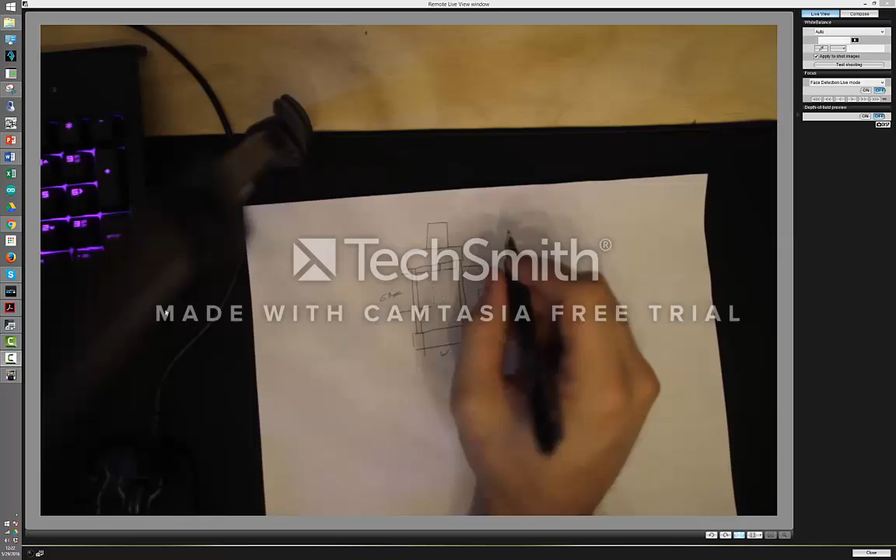So let's jump right into this. Building a hydraulic press is not going to be too complicated. There's not a lot of parts to a hydraulic press. You have the cylinder itself, you have a structural piece at the top, you have the structural pieces linking the top to the bottom, and you have some other system components such as a pump and a control system.

Now, the parameters that define the press itself are the stroke, the daylight, the length in this direction, as well as the width of the press. So those are important to define before you start the project. Usually the best way to define those is to just figure out what you want to stick inside this thing to press on. It could be as simple as trying to remove bushings from parts to something as complicated as pressing a mold with metal or plastic inside of it.

So moving on, let's talk a little bit about the system overview of the press. We have the press itself that we talked about earlier, and we have the hydraulic pump that gives the power to the press. Not all presses are going to be hydraulically operated. Some can be mechanical or electrically operated. And we have some sort of control system that controls the pump as well as the motion of the press, and that'll consist of hydraulic controls as well as electrical controls.

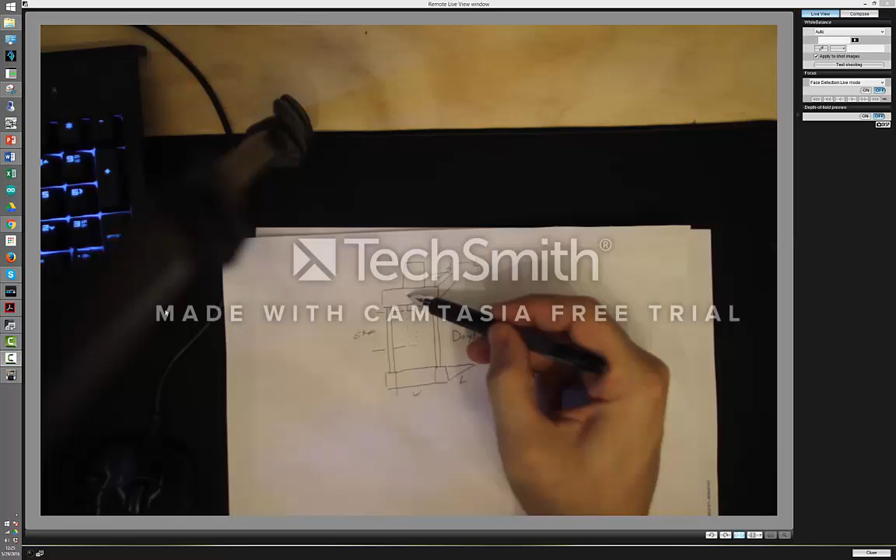The first phase is going to be a design phase. The second phase is going to be a build phase, and the last phase is going to be a testing phase. So during the design phase, what we'll begin with is the actual design of the press physical components, the structural components. So we'll design and come up with equations to specify this top portion here, each of these little side pieces here, this bottom portion here.

We'll design the actual cylinder itself, and we'll design all the bolting connections to make sure everything goes together and doesn't come apart when we apply maximum force or maximum load or maximum displacement or maximum speed. The second thing that we'll design is the cylinder assembly and the hydraulics. This is somewhat separate from the controls.

The hydraulic controls are a little bit different than the electrical controls, but we'll somewhat try to divide these into three separate portions. I think we can accomplish each one of these possibly in a 30 minute to an hour video, but it could be longer. I might have to break them up more than that.

Now moving back to the build phase, we'll try to go through some of the manufacturing and procurement of different parts. Unfortunately, I'm not sure that I'm going to actually build a new press for this project. We might though. I'm still on the fence on that. They can be pretty expensive, especially the manufactured parts, and I've already got several functioning presses.

So what we might do is go over the necessary steps to do that and talk about them, and then utilize the components I already have and go through the assembly, especially on the hydraulics. I actually have specified out a new hydraulic system for some of the presses that I have, so that could be real easy to show the assembly of the hydraulics.

And I think honestly the manufacturing of the press components themselves is such a simple process, and there have been so many other videos that have gone over that sort of manufacturing, that it's really not going to add anything to what's already out there. The assembly, though, there are some interesting things that we would want to do when assembling this press that I think are worthy of going through.

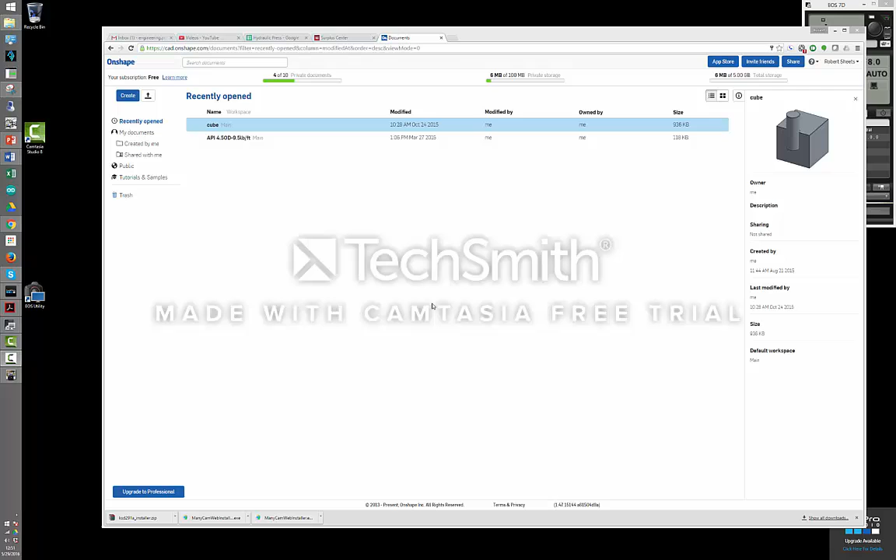So the next thing I want to do is make some decisions that have to be made to move on with the project. One of those sets of decisions is to flesh out these initial parameters. I have some stuff written here - this isn't what we'll end up with, but I'm going to do some measuring of parts we're going to make, and come up with parameters such as the daylight, stroke, tonnage, the action, the press mechanism, the frame configuration, the width, the depth, the budget, the electricity availability, the time frame, the controls, and the footprint we have to stay in for our press.

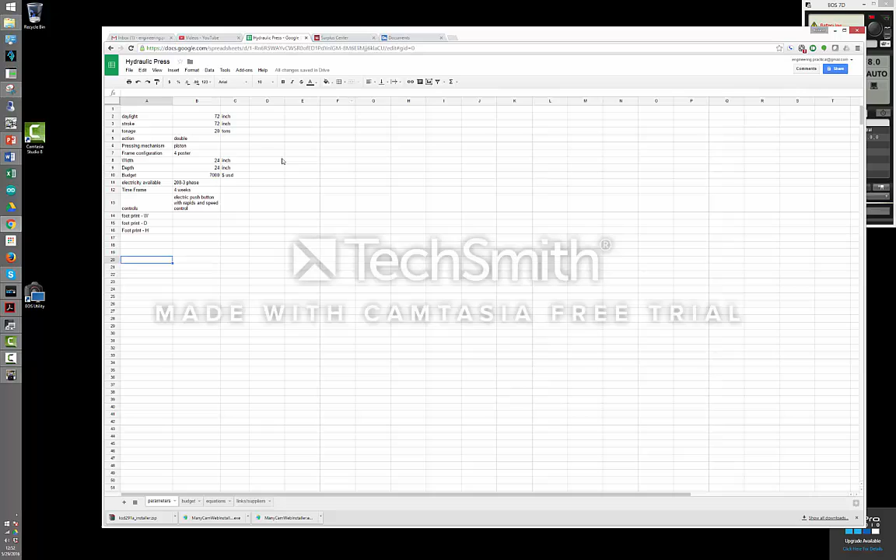One of the key things to define all this is that this press needs to be built around a hydraulic cylinder. There are several options for hydraulic cylinders. The first option is to buy something used. Surplus Center is a great resource for hydraulics, especially on the used side. They have a great website - you can go in and pick basically anything you need.

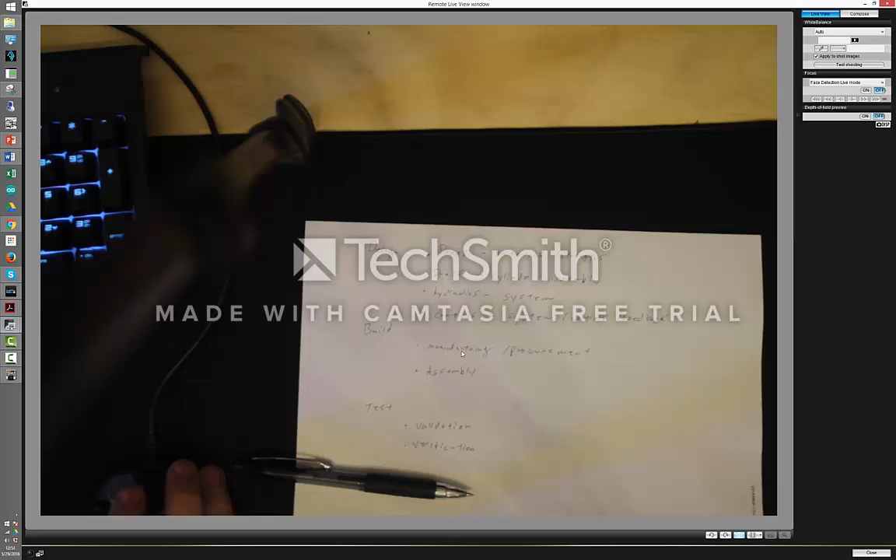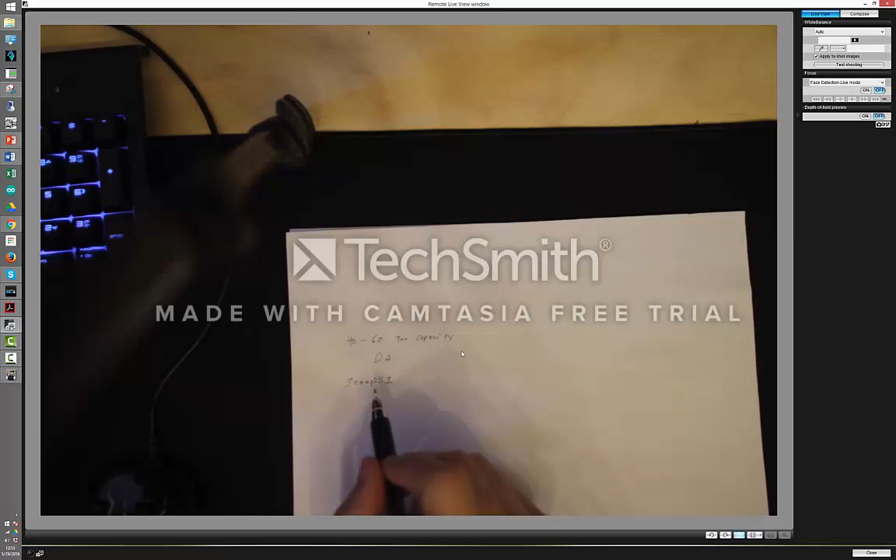So in order to choose a cylinder, we need to come up with the capacity of this press. I'm going to choose an arbitrary 40 to 60 ton capacity, and this is going to allow us to select a cylinder based on that. We know we want a double acting cylinder, we want it to be 40 to 60 tons, and system pressure for hydraulics is commonly 3,000 psi - that's a pretty common standard amount of pressure you're going to find. So with these three components, we'll definitely be able to narrow down our cylinder choice.

I want to start by saying in these videos that I wasn't born with any of this knowledge, and if you feel confused or feel like I'm not explaining something properly, don't be afraid to ask. I was taught all of this by someone else, and I had to figure it out, either by way of teaching or on my own, and it didn't always come quickly. So if something's not clear, please ask me in the comments, and I'll do my best to create other videos to explain stuff and make it as clear as possible.

After recording some video, I think I might have jumped into some things a little too quickly, and I wanted to come back and discuss the principles of operation of hydraulic systems and why we use them and why they work.

The principle of hydraulics revolves around force over area. So pressure equals force over area - this is a governing equation for hydraulics, and it's very simple. If you apply a given force to an area, you get a pressure. If you apply a given pressure to an area, you generate a force. So these items are all related to one another. We can rewrite the equation again with force over pressure equals area.

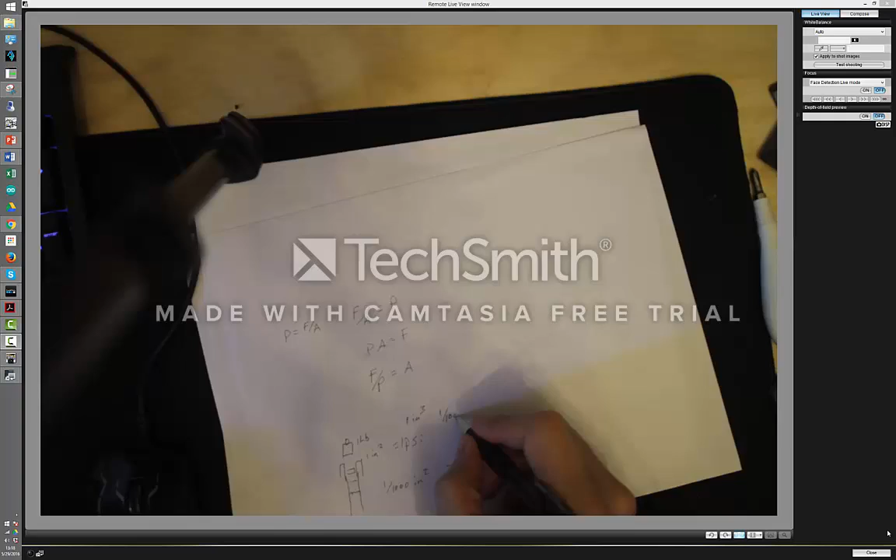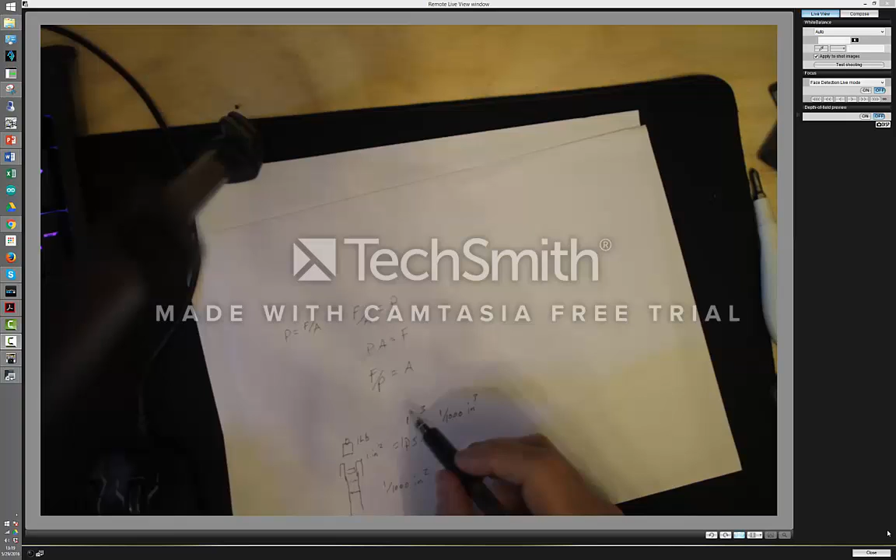Now the same thing for the really tiny 1/1000th of an inch squared area cylinder is that every time it moves an inch, you only get 1/1000th of an inch cubed in volume displacement. So you've got to push a lot further, 1,000 times further, for this one to get the same amount of volume as this one.

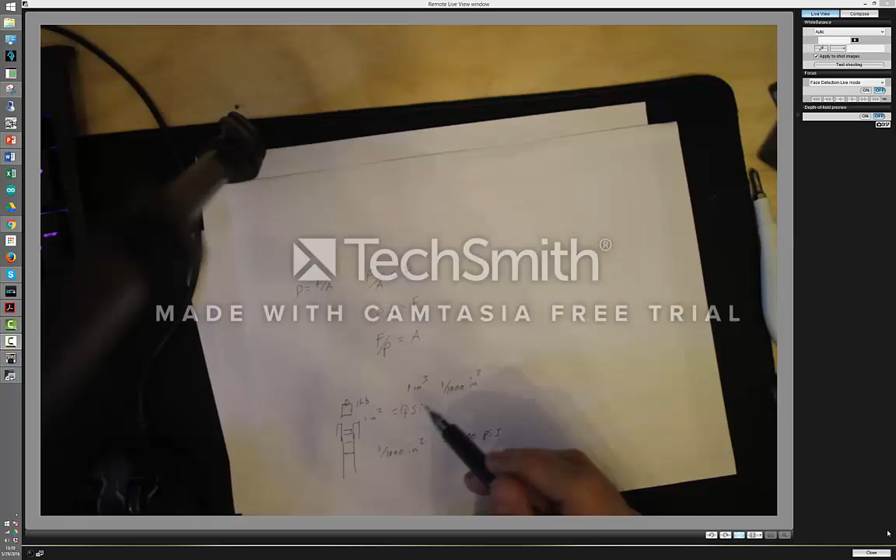So that's not really that important when you're trying to generate a static force, but when you're trying to move something large that requires a lot of volume displacement, the amount of work you have to do is significantly increased. So the amount of work to get 1000 psi is nearly 1,000 times more than the work to get 1 psi with the same force. This in a hydraulic pump is what's related to getting your horsepower and the energy it actually takes to power the system.

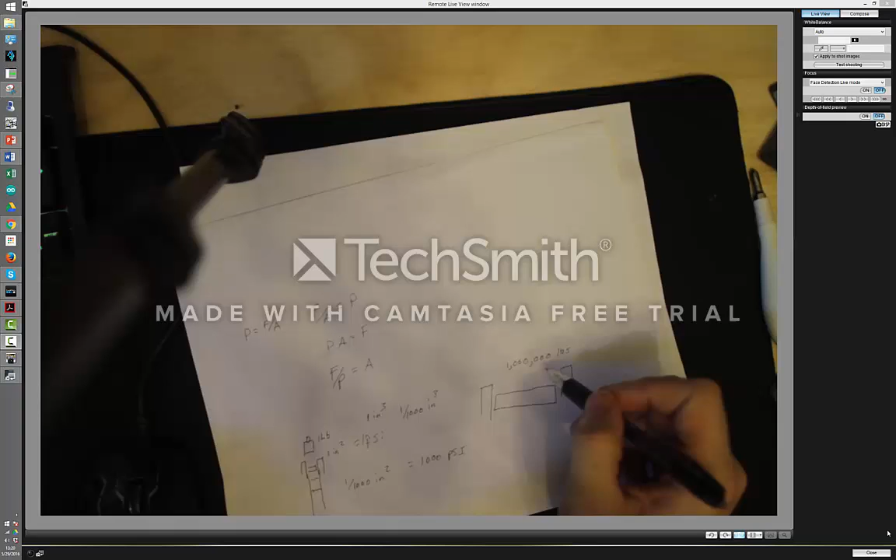So looking at the other direction, say we have this 1 psi weight, this 1 inch cylinder with a 1 pound weight, and we generate 1 psi. Well, we can theoretically move very immense loads if and only if our cylinder has enough area. So for a 1 psi system, say we needed to move 1,000,000 pounds. Well, in that case we would need a 1,000,000 square inch cylinder in order to move that 1,000,000 pounds with just slightly more than 1 pound.

But again that trade-off comes into play here. So say you have that 1,000,000 pounds on top of the 1,000,000 square inch cylinder. Every time you put a cubic inch of fluid into that cylinder, it's only going to move the cylinder up or down by 1/1,000,000th of an inch. So there lies the problem: you have this balance between a small amount of force over a small amount of area not giving you very much distance traveled.

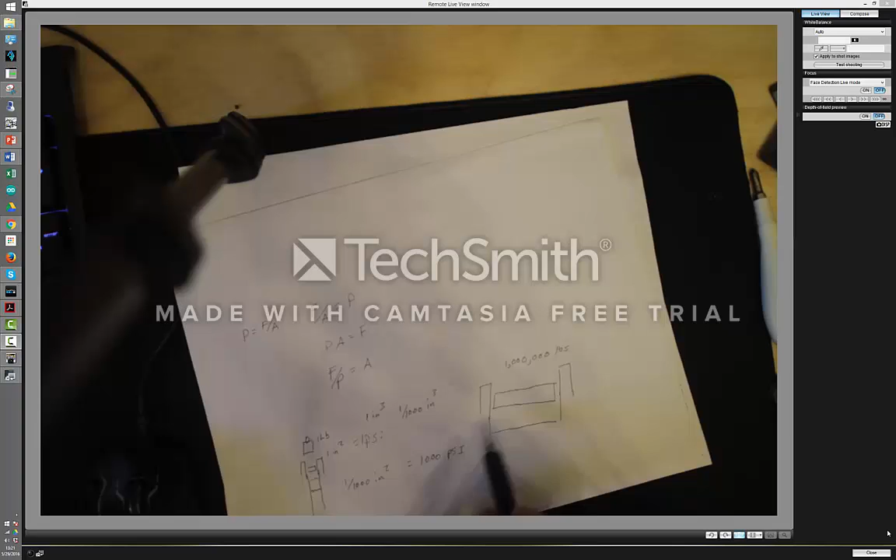I hope this somewhat clarifies how the force, the pressure, and the area interact, and kind of why we use hydraulics. Because again, you can use small amounts of force to generate very large amounts of force. However, there's a trade-off in the amount of work you have to do in order to generate the motion.

So the way we'll be able to make that cylinder choice is pretty easy. We know we have a maximum pressure of 3,000 psi, and we want 40 to 60 tons. So starting at the low end, 40 tons times 2,000 pounds gives us 80,000 pounds, and on the high end that's 120,000 pounds. In order to convert this to cylinder diameter, we know we have a 3000 psi maximum system pressure, so if we take 80,000 and divide it by 3000, that gives us the particular areas we need.

Forgive me for not being able to do this in my head, I'm going to use a calculator here. So that's saying we need a 27 inch squared area, and on the other one, we're going to need 40 inches squared.

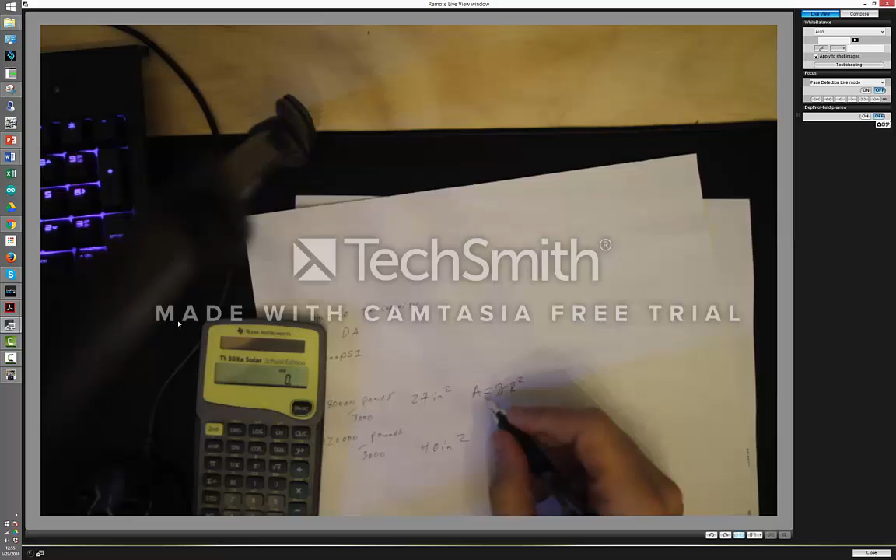So once we have the area we need, we then find the diameter we need. That's pretty easy: the area of a circle equals pi r squared. So if we solve backwards for r, which we can get d out of, because 2r equals d, then we can come up with the radius or diameter we need. We know we're going to have two different ones, 27 and 40 will be our a variable. So the first thing we'll do is a over pi equals r squared, and then if we take the square root of a over pi, that equals r.

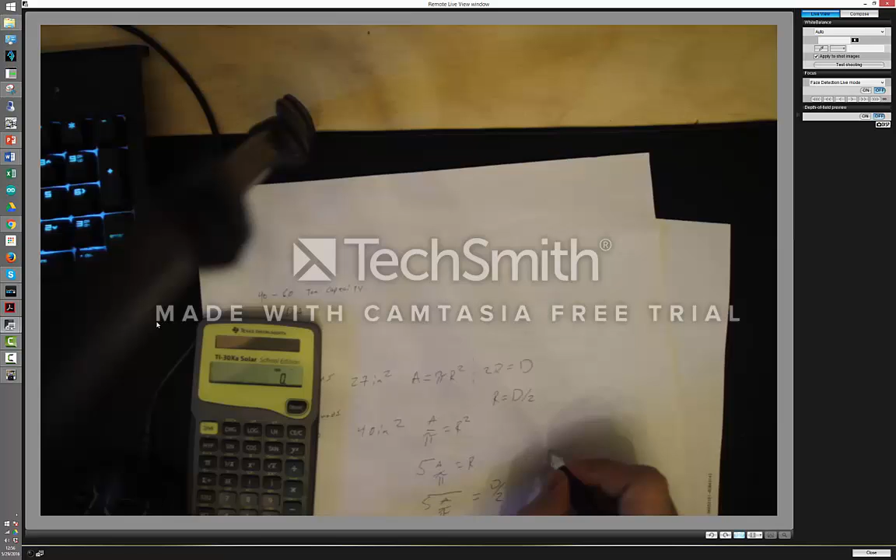Now, if we substitute in for d, we can do r equals d over 2. If we plug this into the equation, we get the square root of a over pi equals d over 2. Multiply both sides by 2, and d equals 2 times the square root of a over pi. We then solve this equation to get our diameter.

So that's 8.6 under the radical, and we got 12.7 under the radical. So that one equals 2.9.

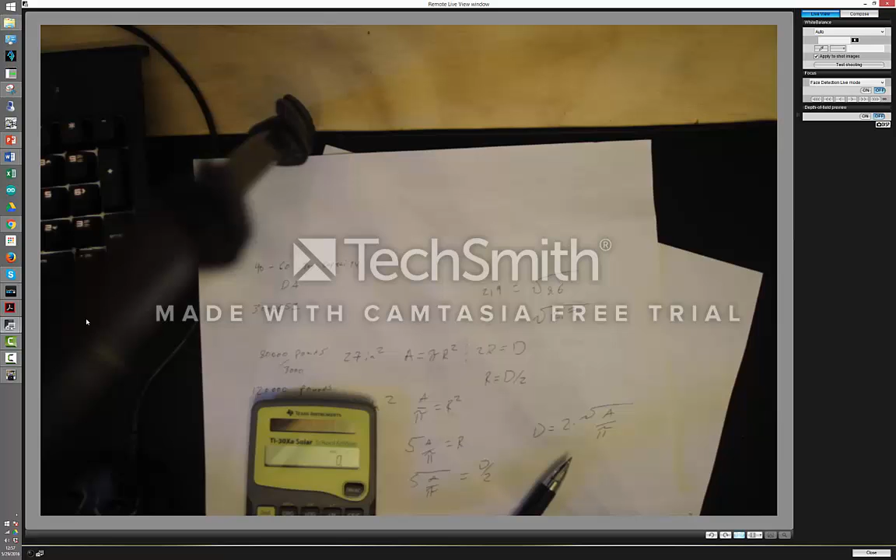So if we substitute these two back into this r equation, or multiply them by 2, basically we're getting that we need a more or less a 6-inch diameter, and we need a 7-inch. So we need a cylinder that's 6 to 7 inches.

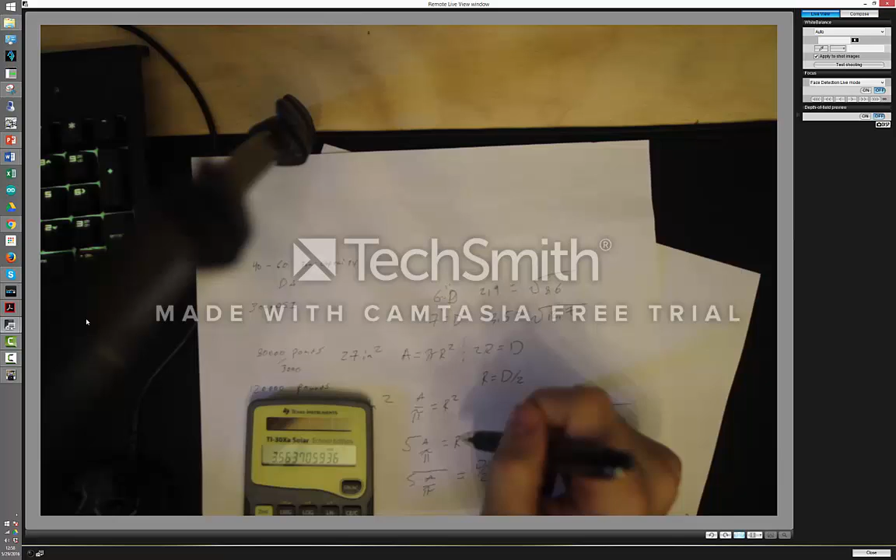And if any of this is confusing or you don't follow, I can make a separate video that shows this over again and tries to simplify it out or make any steps that are lost more clear.

So now that we've narrowed down our search to the diameter that we need, I've gone through and looked around at what they have there so we don't have to spend so much time on their website. Basically what I've done is I've gone to hydraulics, then double acting cylinders, trying to narrow down our range. I went to 7-inch and larger because I feel like there's a cylinder here that'll work.

So now that we have this cylinder selected, we're given quite a bit of information. Enough information that we can successfully model this cylinder in our CAD program and use that to start our modeling and begin the design derivations or iterations in order to create the press.

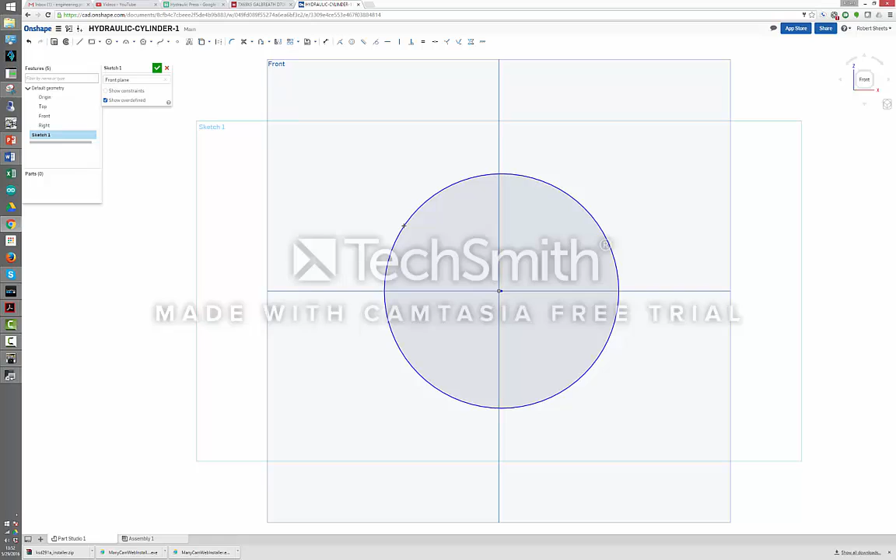So we're gonna make this the inside diameter of the cylinder. It's not really necessary to make this as it is, but in this case, I'm going to go ahead and do that.

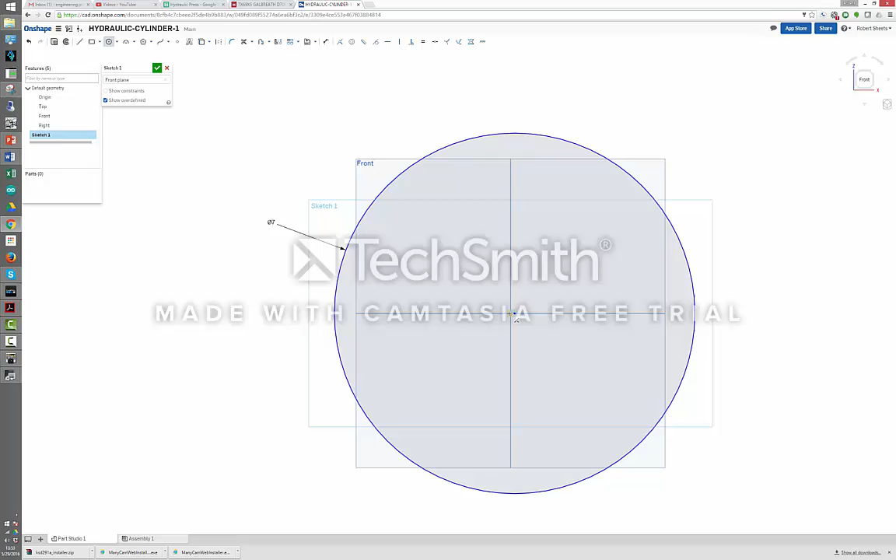Now, unfortunately, this does not give us the dimension of the actual outside of the cylinder. I'm going to make an assumption that it's not going to be much bigger than 8 inches, or maybe 8.5 inches, based on these pictures. Sometimes that's just something you have to do whenever you're presented with surplus equipment, or you're trying to model something you don't know exactly. You just gotta make a decision and put it in there and live with it, good or bad.

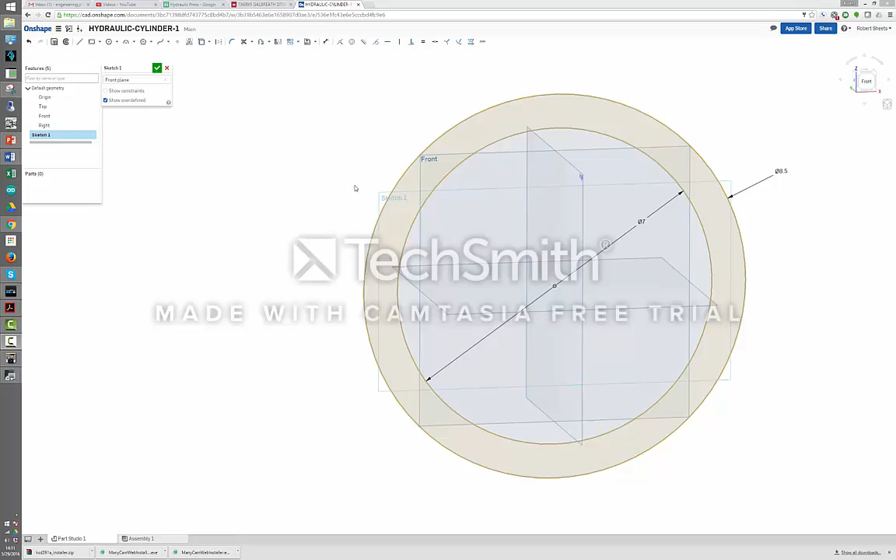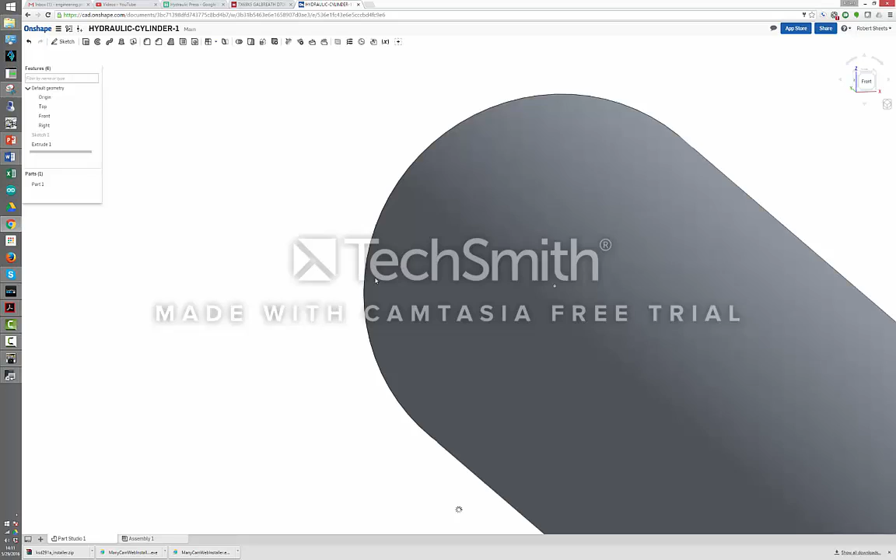So now we're going to extrude the cylinder out. We're gonna make it the length specified here, which is 76 3/4. Not 100% sure that that is the entire length of the base to the back end of the cylinder, but I believe that's what they're saying there. It'd be helpful if they would provide a drawing, but they don't, so it's kind of the best you can hope for. Some of the stuff on their website's a little bit more detailed than others.

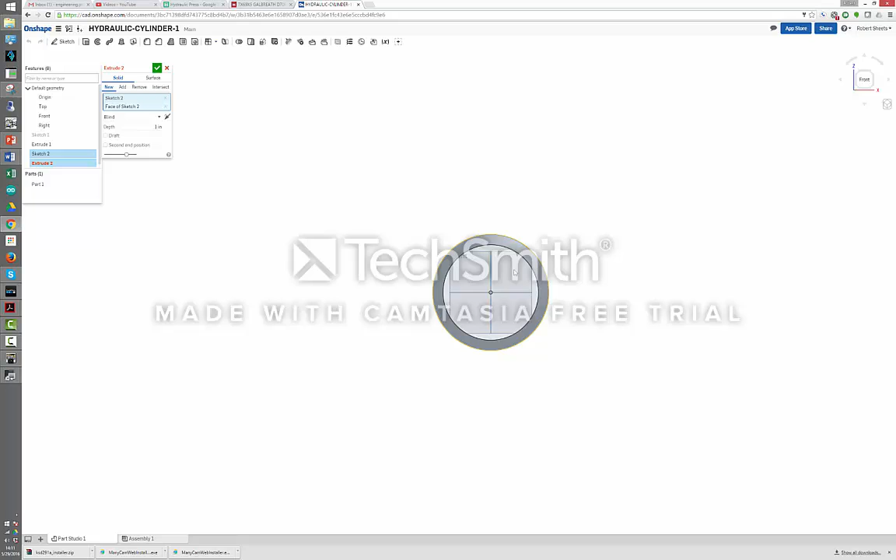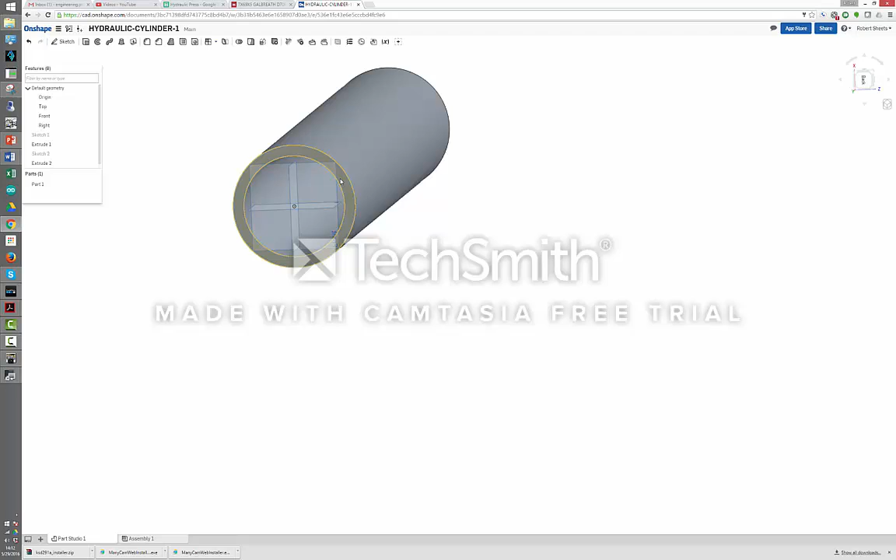We're going to close the end of this cylinder with another extrusion. That's one nice thing about Onshape — you don't have to make a new sketch all the time for the extrusion. I feel like you have to do that more in SolidWorks; it's a little bit more intuitive sometimes. So now we're gonna go ahead and create the flange over here.

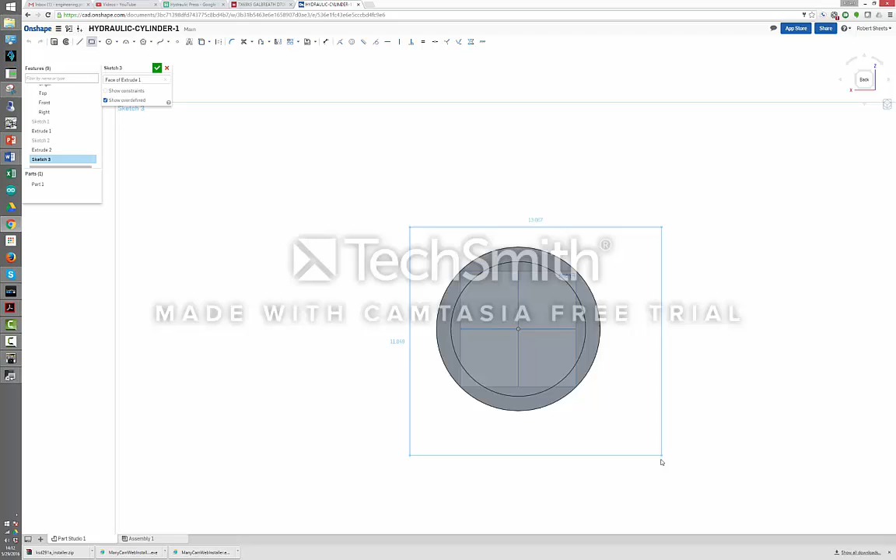So we'll start out by creating a square, 12 inches by 12 inches according to the drawing that we got from them. There we go.

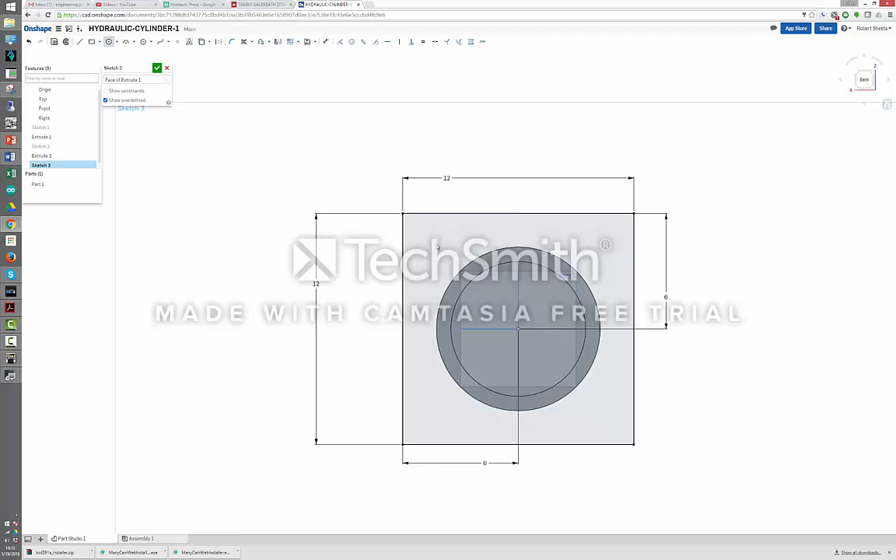If you guys are picking up any background noise, I do apologize for that. I don't have the best mic setup since this is something new that I'm doing. I'm just trying to work with what I've got, which is a pretty standard headset. But if this actually is well received, I might upgrade some of my equipment.

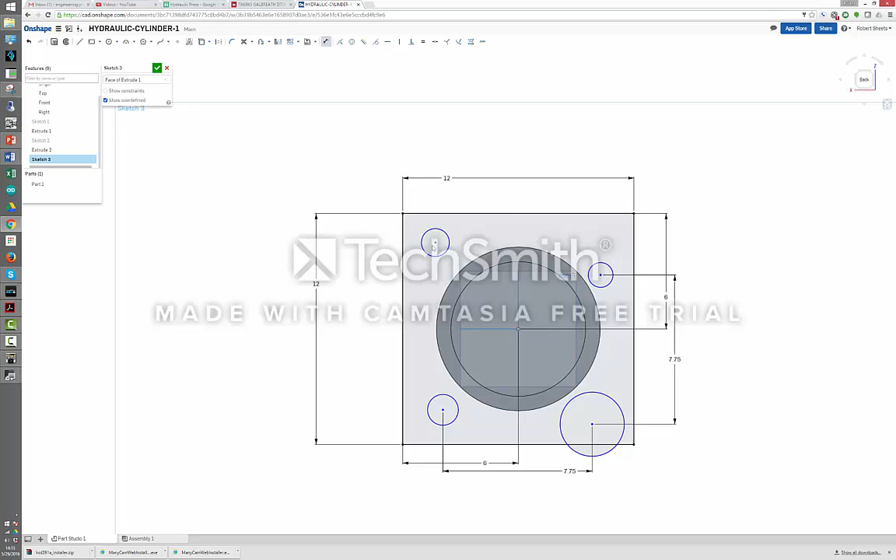One thing that's a little strange about Onshape is the way that you select constraints in a sketch seems to be a little bit different than SolidWorks. For whatever reason, it seems like they're missing a collinear constraint, but maybe that's just what I'm doing here right now, and it's just a little bit odd for the program or something. I'm not entirely sure.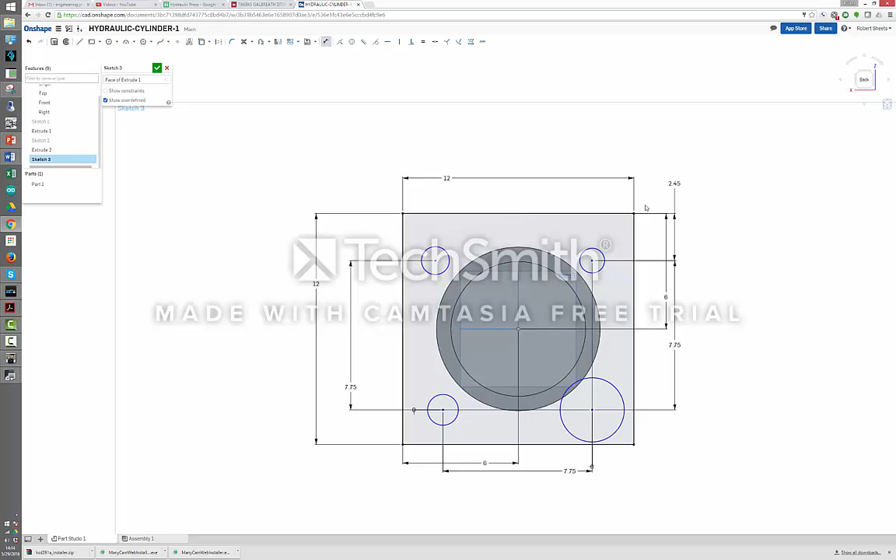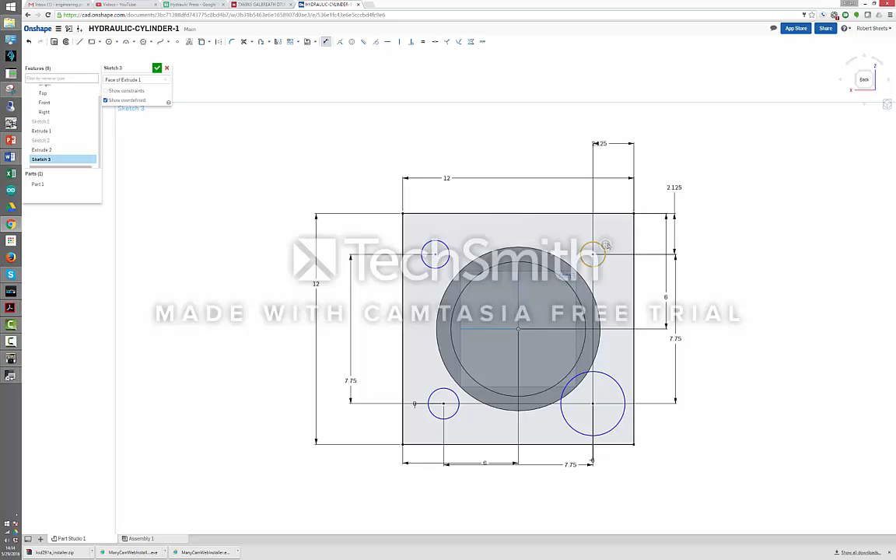Specify this dimension from here to here, which is going to be the difference between 12 minus 7.75 divided by 2. This would be 2.125. And I'll specify the dimensions from here to here. Then we'll just make our hole size.

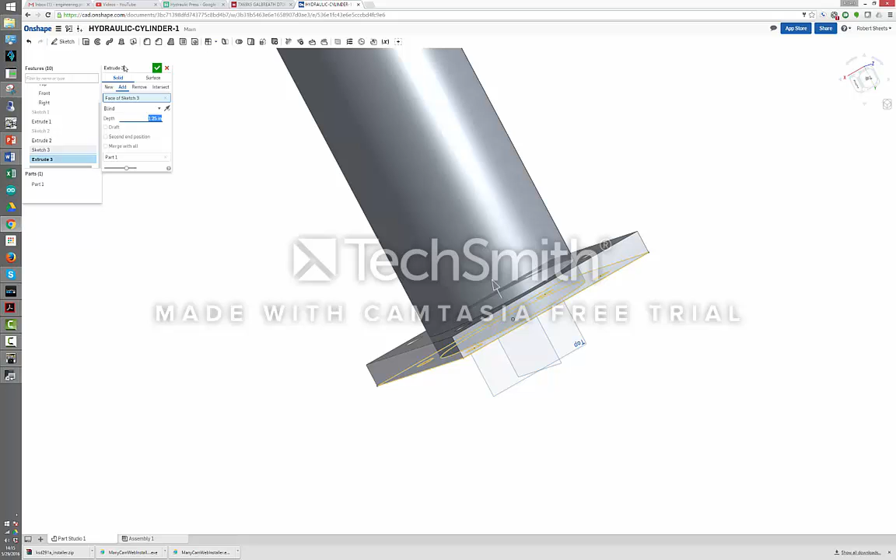Done with that, extrude that portion. And it needs to be the opposite way and 1¼ inches. And that'll do it for the body of this cylinder. I'm going to create another part for the actual rod. That way we can manipulate it inside. So we'll pick up there.

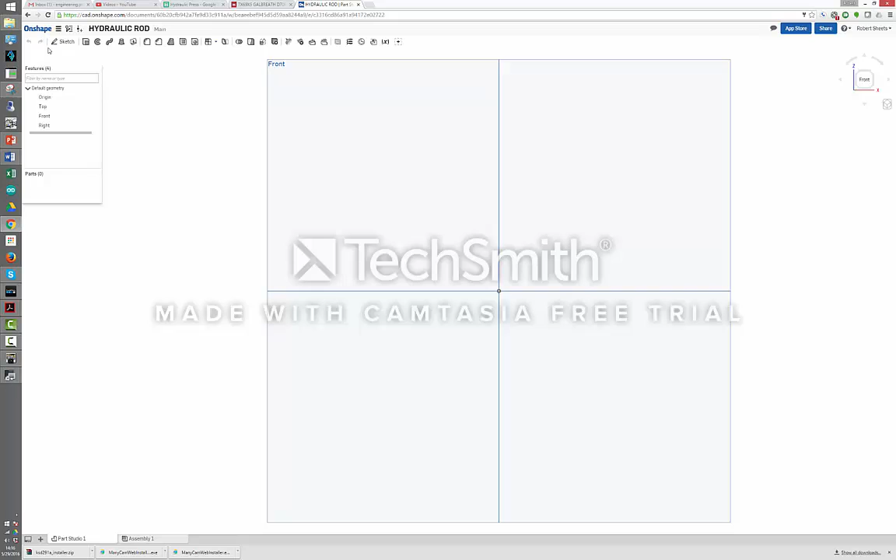So picking up at the hydraulic rod. Design this simply enough. Again, start at the front plane, create a sketch there, circle. I'm using keyboard commands for some of this stuff. It's just what I'm used to. Luckily, the keyboard commands in Onshape seem pretty intuitive. This is all just arbitrary lengths. They aren't really all that important.

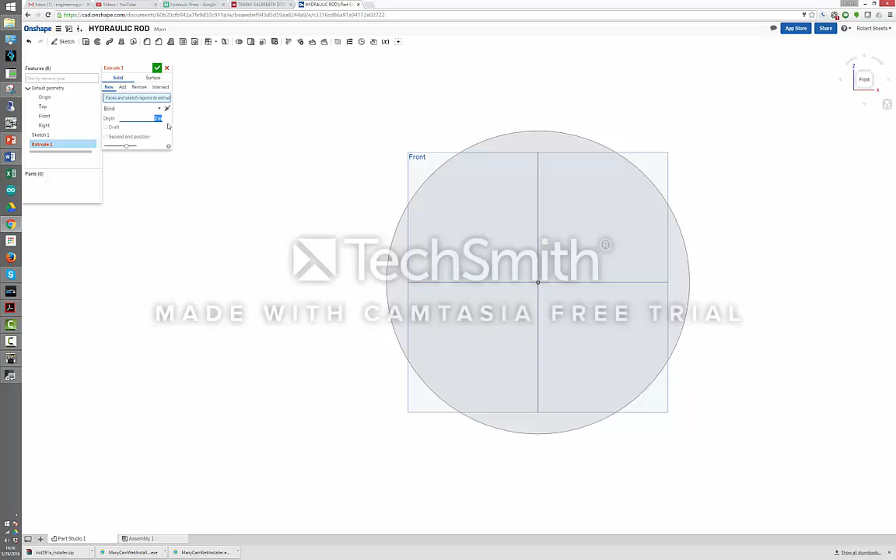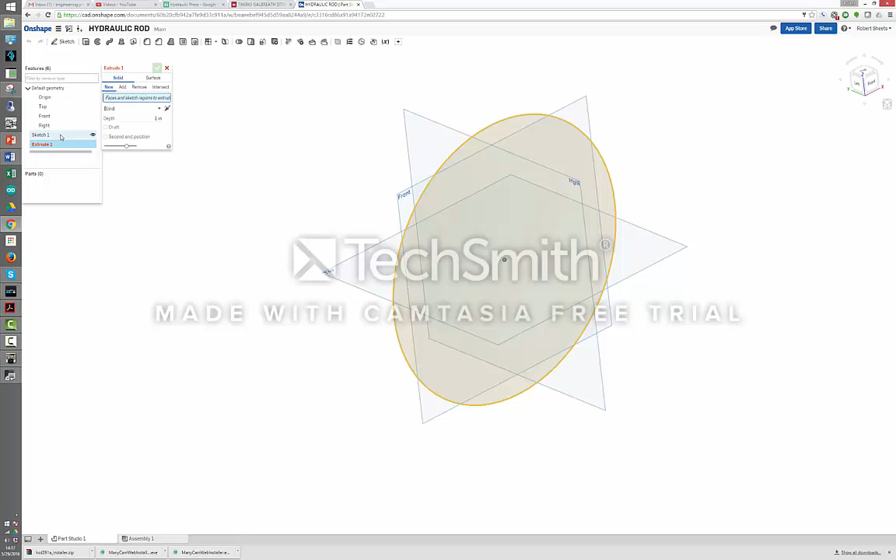Some sort of error here. Let's see what they're saying. It's saying that we're not selecting something on this extrude. I'm a little bit confused there. Let's try this again. Extrude solid from sketch 1. Extrude that, say 4 inches. Okay, there we go.

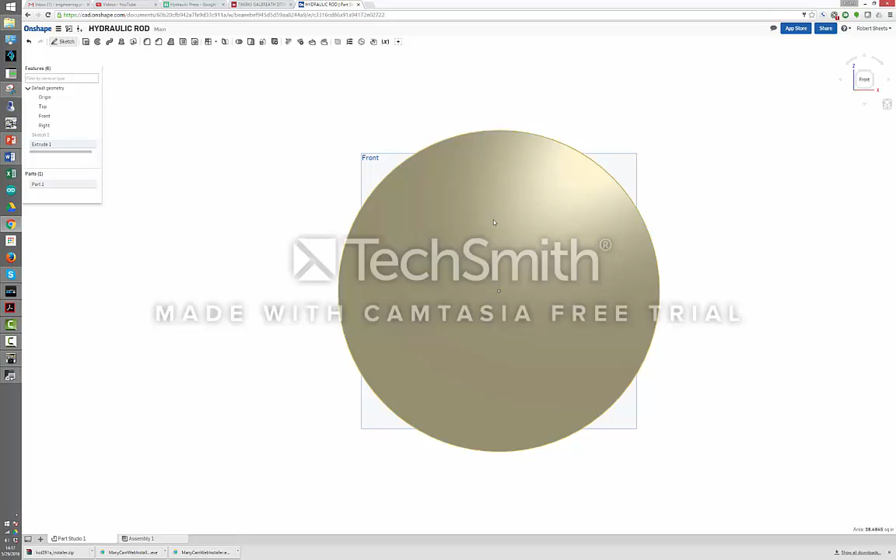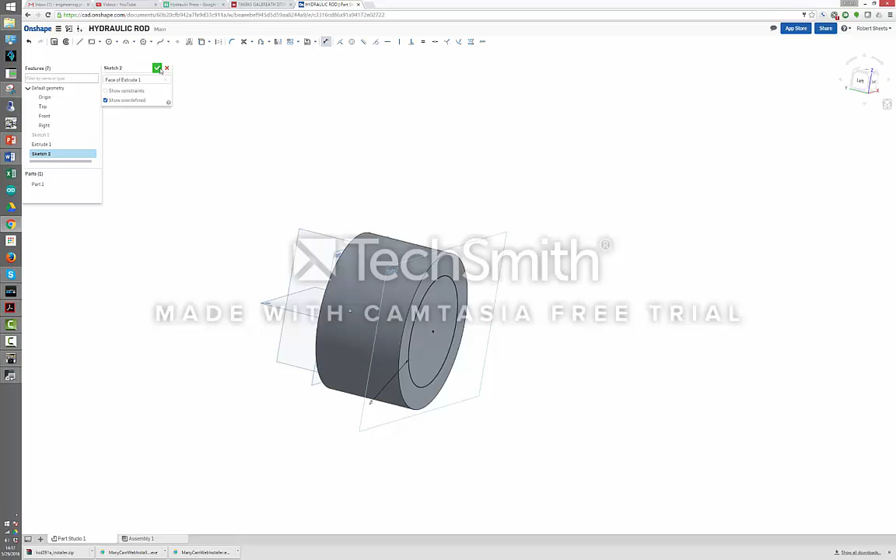And we'll make this part the actual same dimension as the rod. And we're going to make it slightly longer than the stroke. I'm going to give it 2 more inches than the actual stroke of the rod, just in case we need to put some stuff inside to manipulate it. But I think that should be pretty good. So make that 71 inches. Check. And we have our cylinder rod.

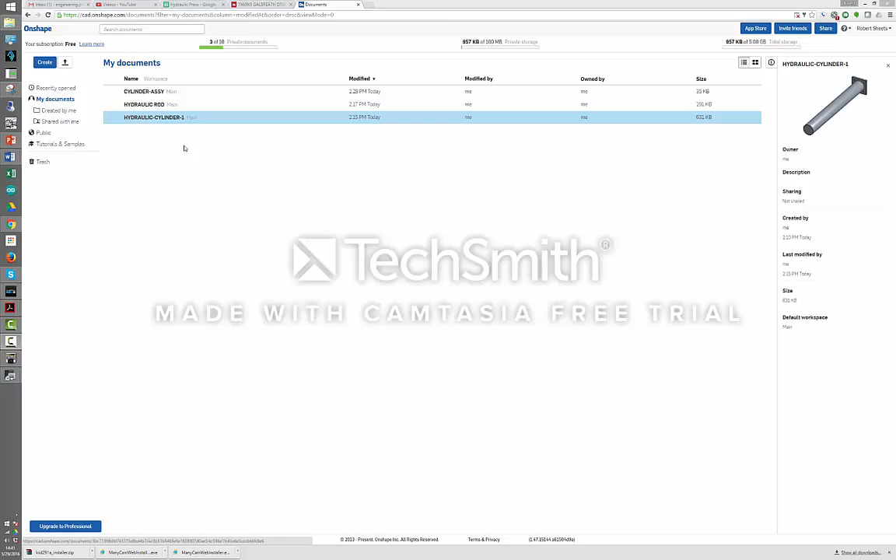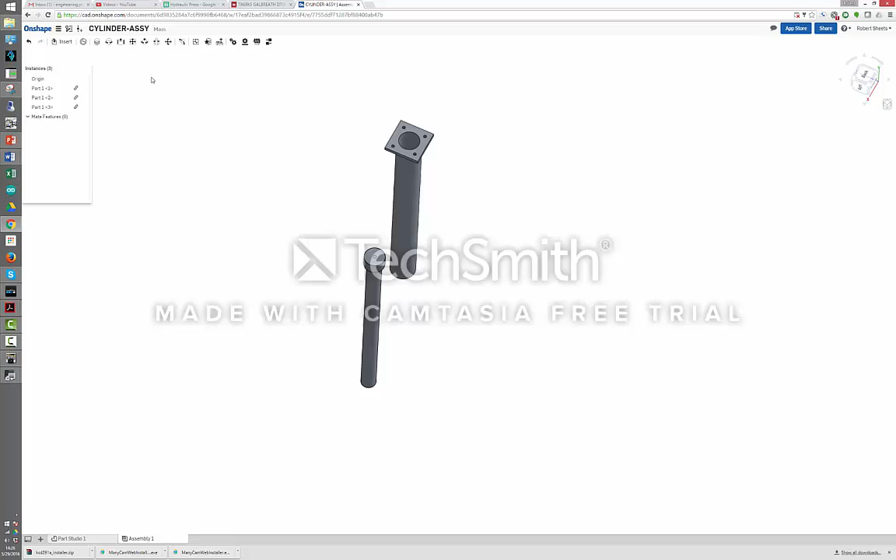One note is that in Onshape, I'm not exactly sure why it does this, but every time you make a drawing, you have to go back into the drawing, it seems, and in order to put it in an assembly, you have to save a version. So in this case, it's wanting me to version 2, but I've already previously created versions of each of these so that we could place them in the assembly. Parts inserted here, and I'm going to mate them.

Off camera, I've done a little bit of research and figured out what I was doing wrong and what I need to do. So it seems like the slider mate is the proper mate to use here.

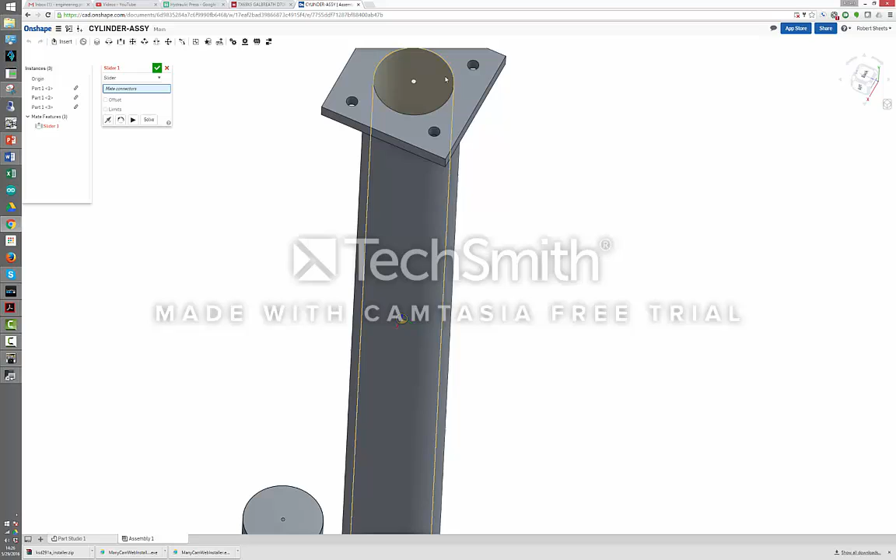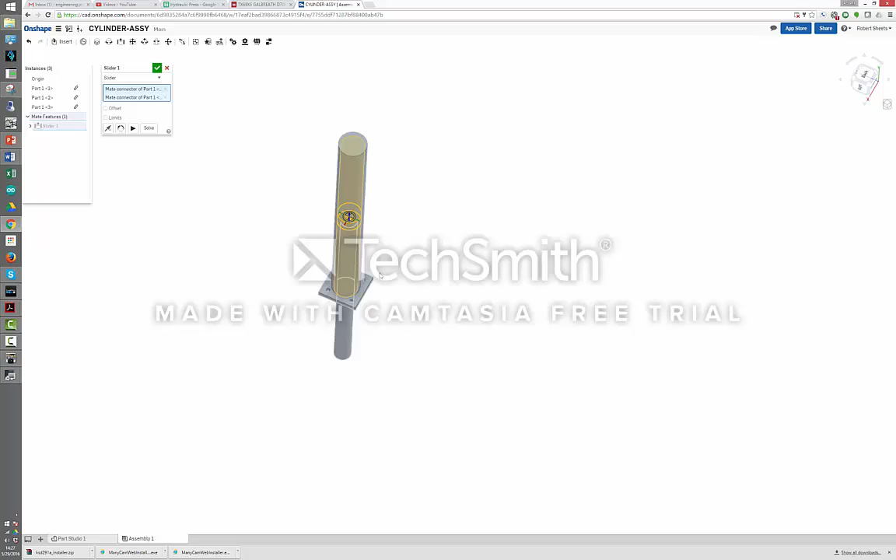And everything in Onshape is a little bit clunky. Honestly, if SolidWorks is clunky, this is even worse. Which SolidWorks is pretty clunky. But a lot of times it's struggling with doing things in a semi-quick way, even though it's supposed to be cloud-based and not use any resources on your computer, which I can fully see that it's not. Every time you go to insert parts or mate something up, there's a little bit of lag there, and sometimes you're not exactly sure if it's you or the computer. So that's definitely something that they need to fix up a little bit.

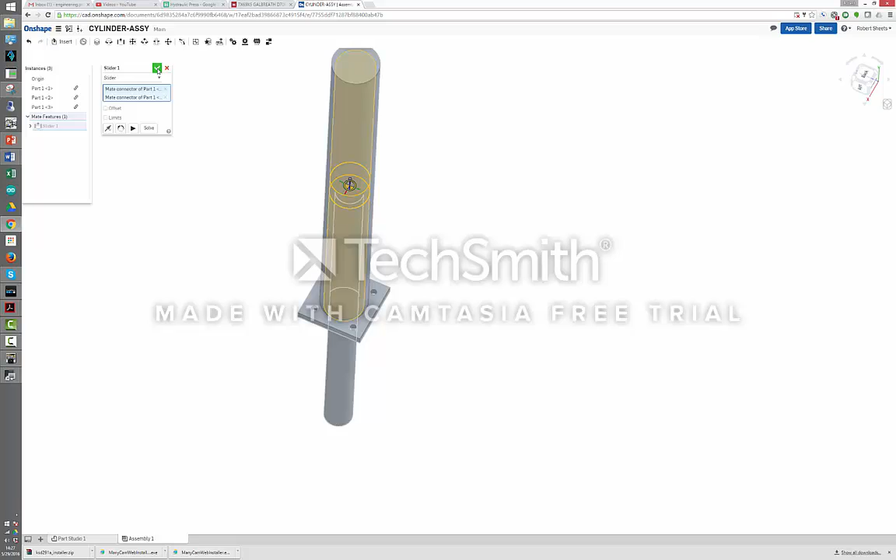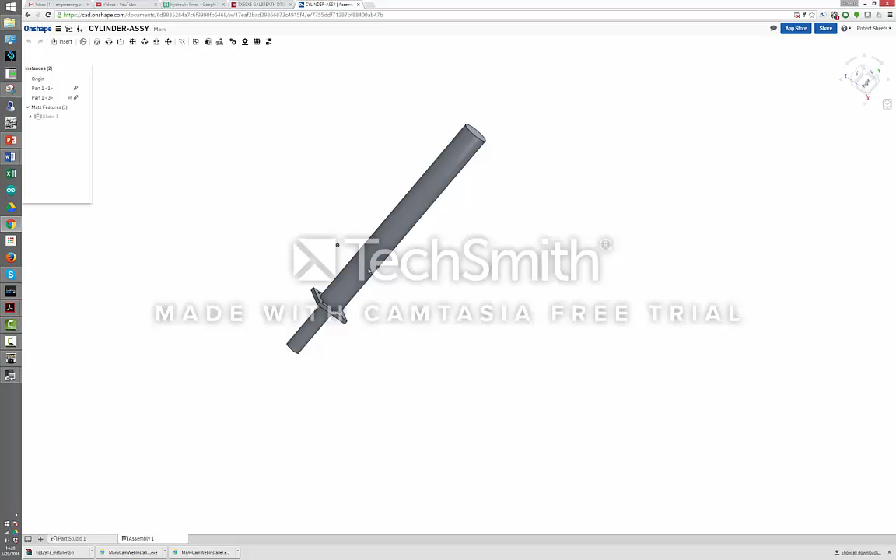So what I can do here is fix this component in space. And then we have our cylinder, which needs some work, but anyway, as you can see, you can slide it around inside and out.

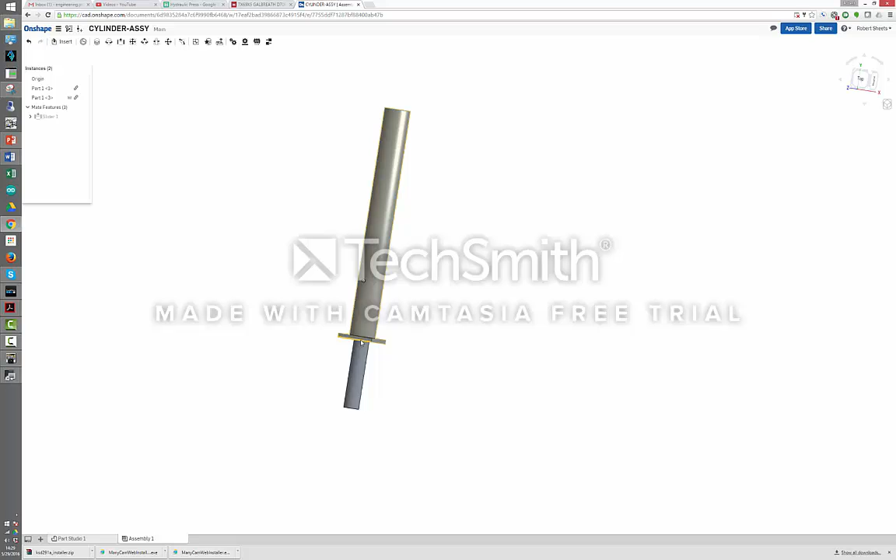So that's going to be somewhat the end of the first video. I'm going to gather up a lot of the parameters today and get ready to make another one. I think in the next video, we'll model the rest of the major components for the press, and after modeling the components, we will then perform calculations on them to get them to a point where they're actually ready to be manufactured. Mostly it'll be strength calculations. There's not too much other stuff we need to do for them, but that's the next step.